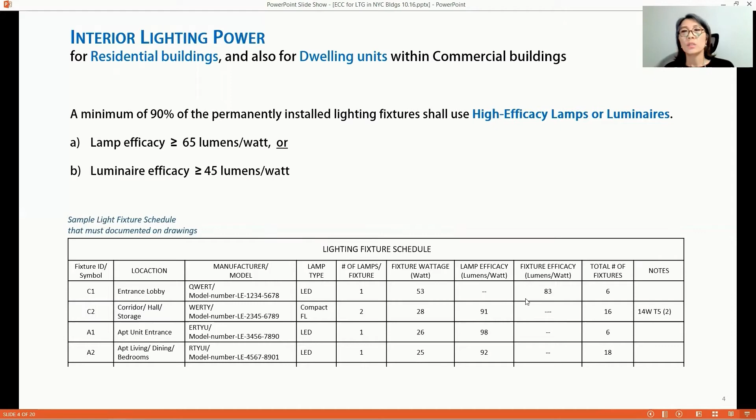For commercial buildings, the total interior lighting power allowance is determined either by the building area method or space by space method, using the watts per square foot LPD values in the code table. To calculate the proposed total power, there is a formula in the code to determine the total connected interior lighting power in the proposed buildings, and this total proposed lighting power should not be greater than the maximum allowance.

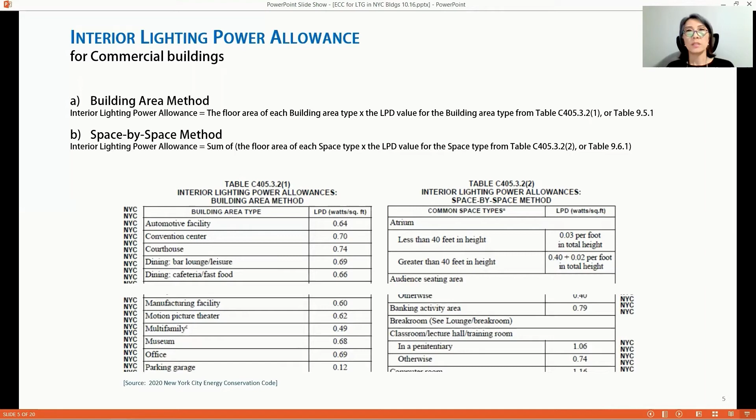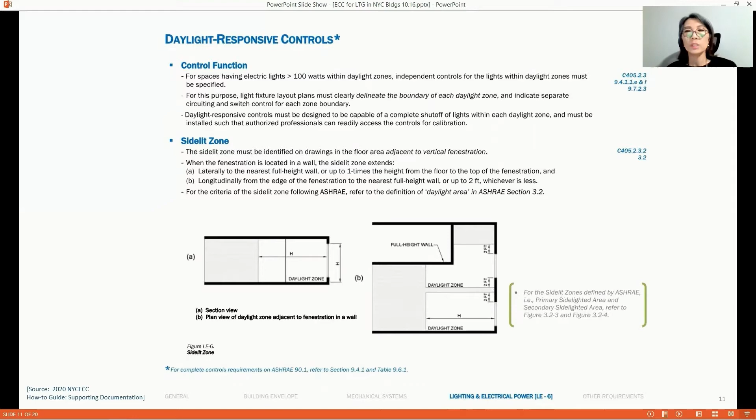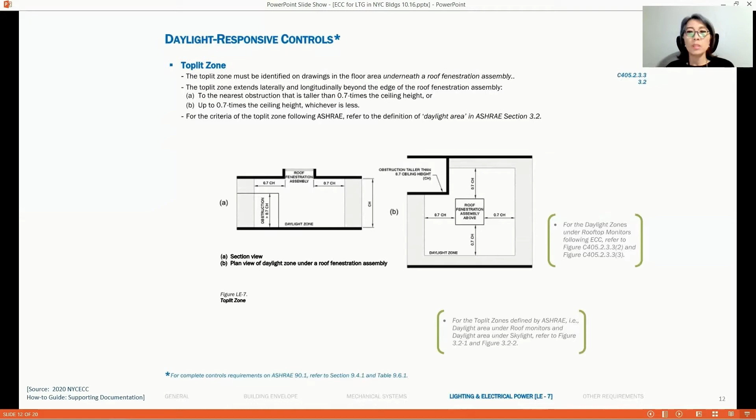And this page is for daylight responsive controls for side lit zones with definitions. And the next page is for daylight responsive controls for top lit zones. I understand this presentation slide will be available to those who attended this session, so I will add the web link to this document at the end of the presentation slides.

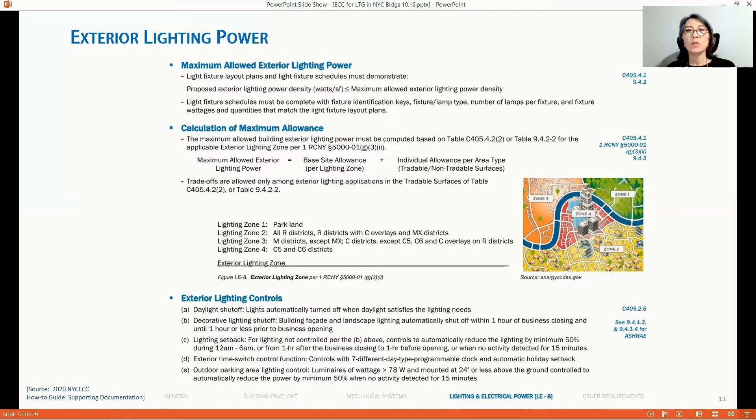For exterior lighting power also, the maximum allowed exterior lighting power by the code is calculated, and that is used to limit the total proposed exterior lighting power. Exterior lighting control solutions are provided through programmable time clocks, photo sensors, or activity sensors, depending on the outdoor areas and needs.

Construction documents submitted for energy code approval must include energy analysis of their choice. There are a few options. Most residential homes submit a simple tabular analysis listing the lamp or luminaire efficacies. Commercial buildings also could use tabular analysis. However, most commercial buildings seeking trade-offs of lighting power among the different proposed spaces choose COMcheck programs. Here are examples of interior lighting and exterior lighting compliance certificates. These programs are available online, and you could also download the programs to your desktop.

These compliance verification tools are offered on websites called Building Energy Codes Program, and those websites are supported by the US Department of Energy. Just note that this COMcheck software is used to create separate compliance certificates for the building envelope and building mechanical systems as well.

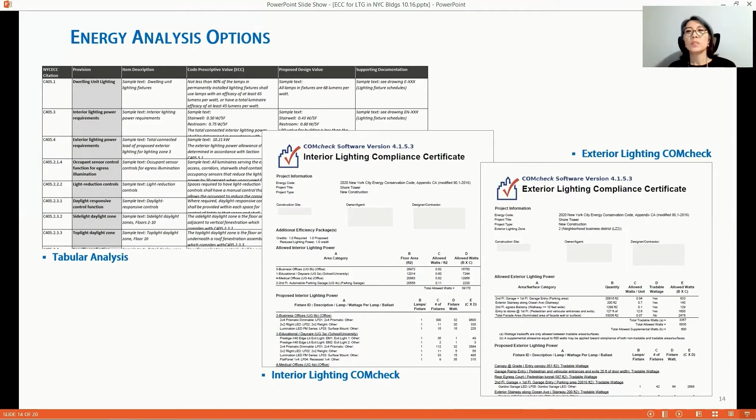Another energy analysis option for commercial buildings is energy modeling. With energy modeling, buildings could utilize trade-offs for compliance among different building systems, such as the building envelope, building mechanical systems, and lighting systems. For example, a new hotel building project or a large retail space with lighting power usage higher than the code allowed maximum could be paired with a better building envelope or more efficient HVAC systems to keep the total energy cost of the building lower than that of the baseline building. ASHRAE 90.1 standard specifies modeling protocols per Section 11 and Appendix G.

And briefly, to talk about what's up and coming in the next energy code updates, currently our office is running a pilot program to test simplified performance-based compliance tools for both interior and exterior lighting, as well as the building envelope and mechanical systems.

Let's check the time here briefly, if I'm doing okay. 15 minutes, okay. So I have to hurry up a little bit.

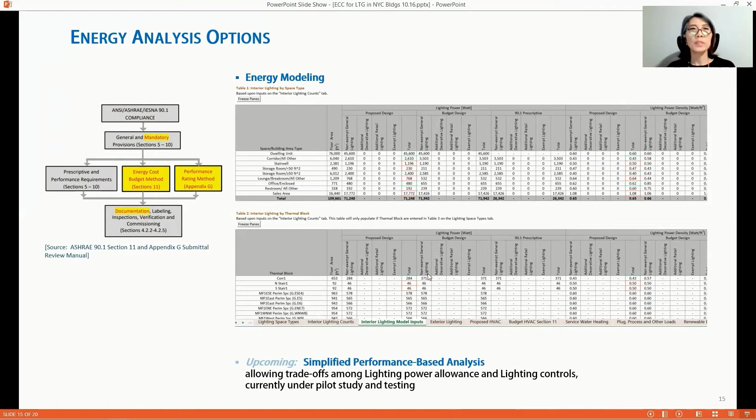So we went over a few highlights of the 2020 NYCECC and how energy code compliance in our city is demonstrated. Last year, New York City was ranked #1 in the 2020 City Clean Energy Scorecard. So we were very thrilled. And this is obviously a result of collective hard work done by many parties in the city.

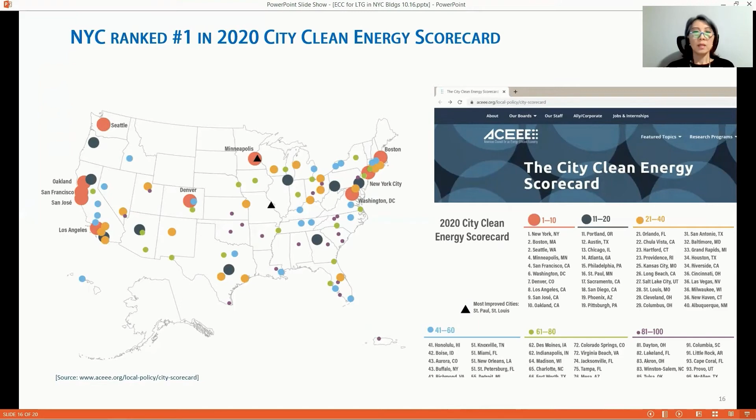But this was possible partly because the Office of Sustainability in the New York City Department of Buildings has the largest energy code enforcement team in the nation. And also we have one of the most stringent energy codes in the nation. In addition to the energy conservation codes, there are New York City local laws that regulate buildings' energy use and greenhouse gas emissions for new developments and existing buildings.

Let me just talk about a few local laws very briefly. Local Law 33 of 2018, amended by Local Law 95 of 2019, mandates buildings to post their building energy efficiency rating near the public entrance of the building. So they must show the letter grade and the score from Energy Star. If they don't post this rating label for applicable buildings, they will get the penalty of a DOB violation and a fine of $1,250.

And Local Law 97 of 2019 mandates buildings' greenhouse gas emission limits and reporting requirements. Per this law, most buildings 25,000 square feet and greater must submit a yearly greenhouse gas emissions report, and their greenhouse gas emissions must not exceed the limits set by the law starting 2024, or they will face a penalty.

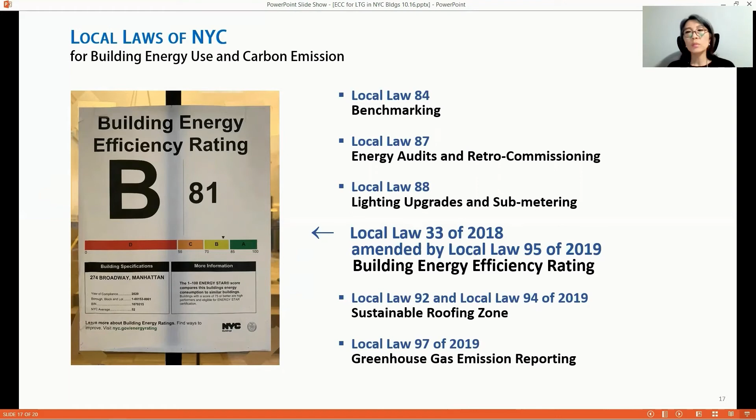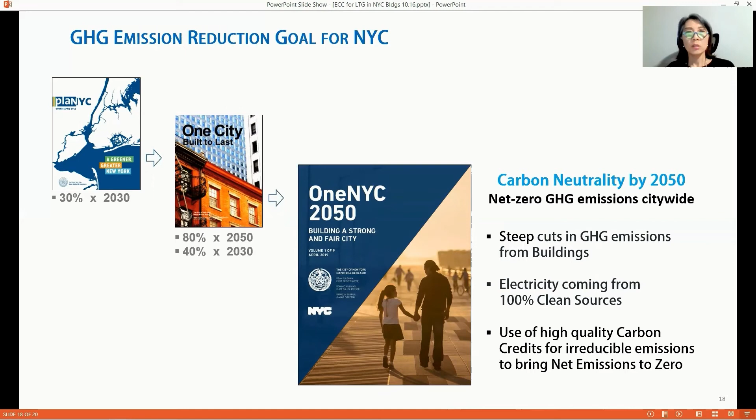Talking about greenhouse gas emissions, in New York City, building energy use accounts for almost 75% of greenhouse gas emissions. So this shows the history of our greenhouse gas emission reduction goals. And let me just highlight that the year before last, with the Climate Mobilization Act in 2019, Mayor de Blasio announced very comprehensive and aggressive climate plans that aim for carbon neutrality by 2050.

I'd like to close my presentation with this most recent news article that shows the city's strong initiative toward electrification in buildings, shifting away from fossil fuels. Currently, many New York City council members are pushing passage of Intro 2317, which would essentially ban new gas hookups in the city. When or if this legislation is passed, all buildings newly built in 2025 and after in the city must use electricity for heating and cooking.

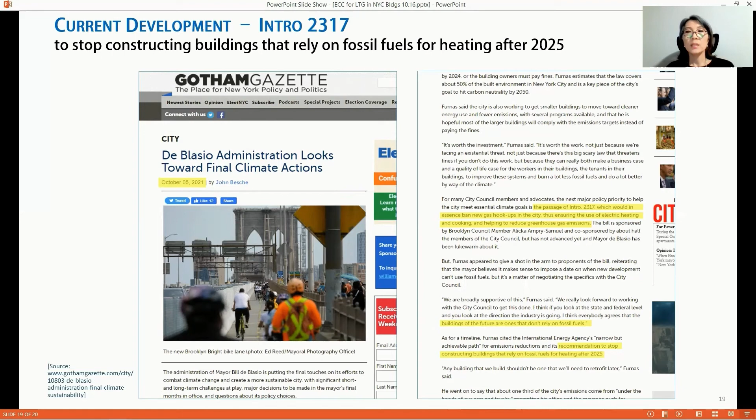That means no more natural gas fueled boilers or furnaces for space heating and service water heating. Also, no more gas fueled cooktops starting 2025. Electrification of all new buildings. New York City has a pretty ambitious target in climate actions.